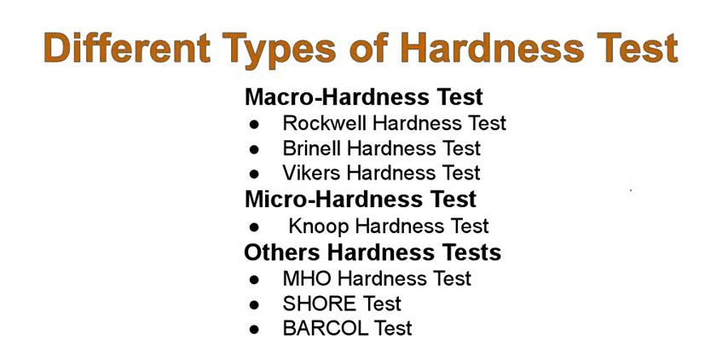Macro hardness test can be done by Rockwell hardness test, Brinell hardness test and Vickers hardness test, and the micro hardness test can be done by the Knoop hardness test. In case of micro hardness test, the indentations are very small, generally done on very thin samples. Other hardness tests like Mohs, Shore and Barcol have their typical uses. So one by one we are going to discuss each of the hardness tests. We'll start with the Rockwell hardness test.

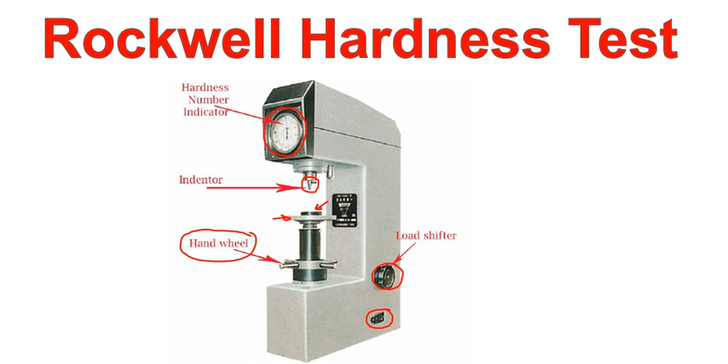Coming to the basic principle on which the Rockwell hardness tester works. Here this is the indenter. Initially a minor load is provided. This minor load is generally provided through the elevator screw, and after this minor load is given on the sample, let us consider this is the sample. As you can see, the major load is given along with the minor load. After giving the major load, definitely there will be deformation, or indentation, within the sample, and the deformation that will take place has two components. One is the plastic component, that is the plastic deformation, another one is the elastic deformation. So combining, this is the total deformation.

Then it is allowed around 15 to 30 seconds at the loaded condition, and after that the major load is removed. And when the major load is removed, some amount of elastic recovery takes place. As you can see, this is the amount of the elastic recovery. So elastic recovery takes place, but this portion, that means from here to here, you can see the permanent deformation that has taken place. So this permanent deformation, small d, definitely is a measure of the hardness, because if the material is soft, then definitely this permanent deformation will be more, and if the material is hard, then it will give more resistance, so this d will be small.

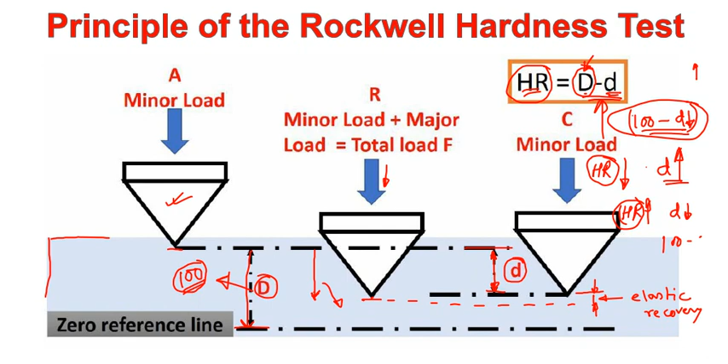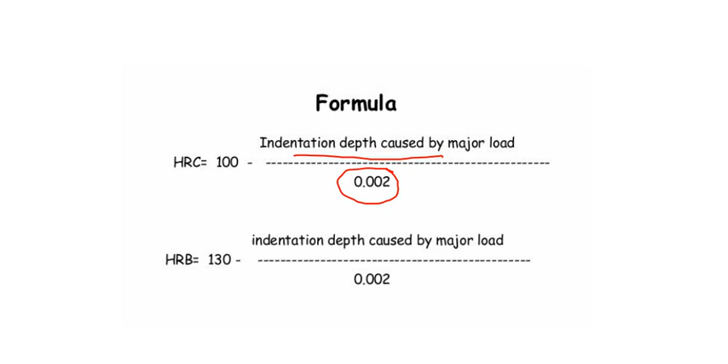Okay, and if d is increased, then 100 minus d will decrease. So in this way this quantity is considered as a Rockwell hardness number. But actually some scaling factor is there, so that is why you can see the indentation depth caused by the major load divided by the scaling factor. Scaling factor comes from the gear ratio that is there within the dial gauge, and because of the unit conversion to some extent. And you can see this is the constant value for the C scale.

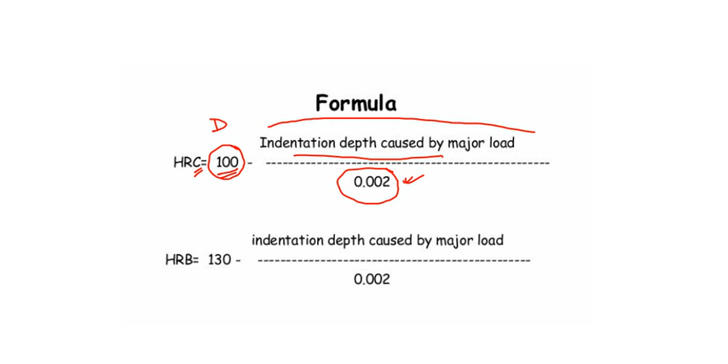Here you can see for the C scale the value is 100. In the previous slide you have seen this quantity as capital D. Okay, so the basic idea is the indentation depth small d is subtracted from the capital D. This is the basic idea of finding it out. HRC means the Rockwell hardness number in the C scale. C indicates a particular scale. Similarly, Rockwell hardness number in the B scale. In the B scale you see that the particular constant value is 130.

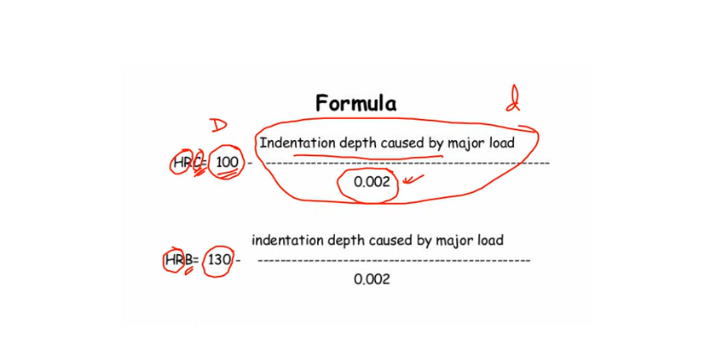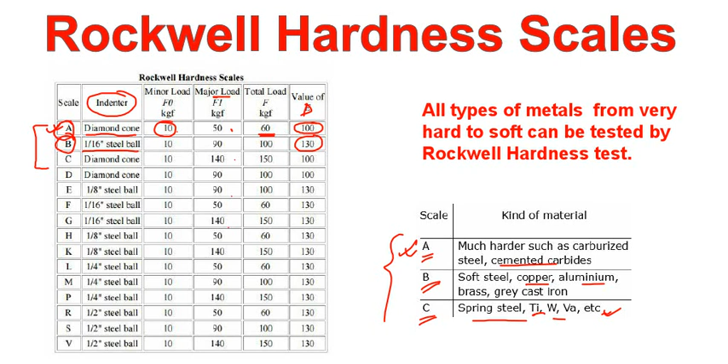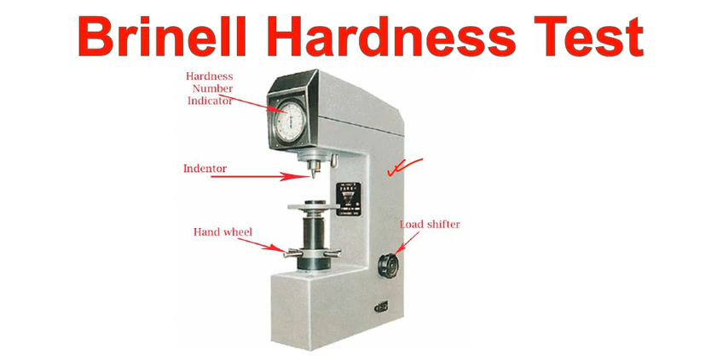Now coming to the Brinell hardness test, on the same test setup you can use the Brinell test. What is the principle? The principle here you have to remember is that a ball indenter is used, and the material of the ball can be steel. In that case Brinell hardness S indicates steel, or Brinell hardness W indicates tungsten carbide. So the material of the ball can be steel or tungsten carbide. So this is the indenter, and the indenter diameter is represented by capital D here. And then a load is applied. Suppose the load is P, applied in kg force, and it will definitely create some impression on the sample. So this is the sample.

It will create an impression, and if you take the projection from the top of the impression, you will see this kind of an impression of the indentation. The length or the diameter of that indentation is measured with the help of a low power, low magnification microscope, generally 10x is sufficient. You take a few data and then take the average of that. So here you will take the average of this, and you will get the indentation diameter, small d.

So here you can see, you put the value of the indentation diameter, put the diameter of the indenter that is used, and the load. Remember, the diameters are in millimeter and the load in kg force. Then you will get the Brinell hardness number. Okay, so the basic principle of the Brinell hardness number is, it is based on the area, the indentation area, the

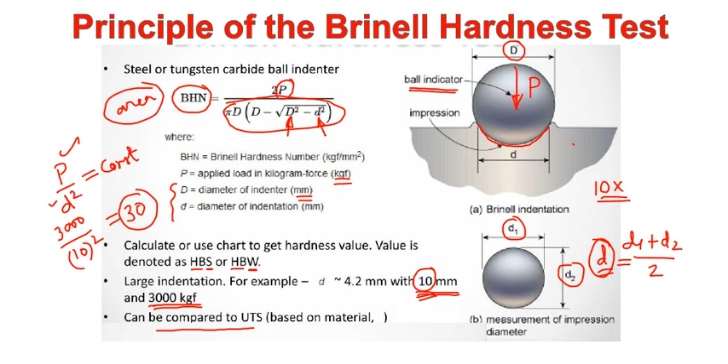Such that this P by D square is constant. So what is the value of this P by D square? You can see it is 3000 divided by 10 square, that means 30. So you select your P and D such that this P by D square is 30. Okay, now this is very, very important, that there is a direct relationship between the Brinell hardness number and ultimate tensile strength of the material.

Okay, many materials have a direct linear relationship with the hardness number. That means if you plot the hardness, Brinell hardness, and the ultimate tensile strength, sigma ultimate, you will get the data falling almost in a linear fashion. So definitely, depending upon the material, these constants are different, but for most of the steel samples, the relationship is that ultimate tensile strength in megapascal, remember, in megapascal, is equal to 3.45 into Brinell hardness number, BHN.

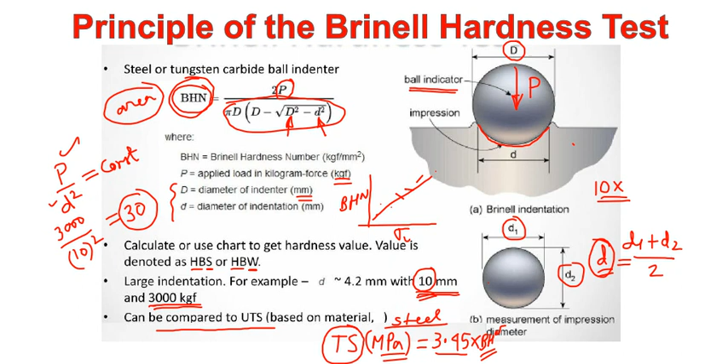Okay, so the Brinell hardness number you will calculate using this formula, and then multiply by 3.45, then you will get the ultimate tensile strength in megapascal unit for most of the steel samples. So here I have tried to show you the indentation measurement. That means the diameter of the indentation is measured under a microscope. As you can see, the low power microscope is graduated, and you can get the diameter of the impression.

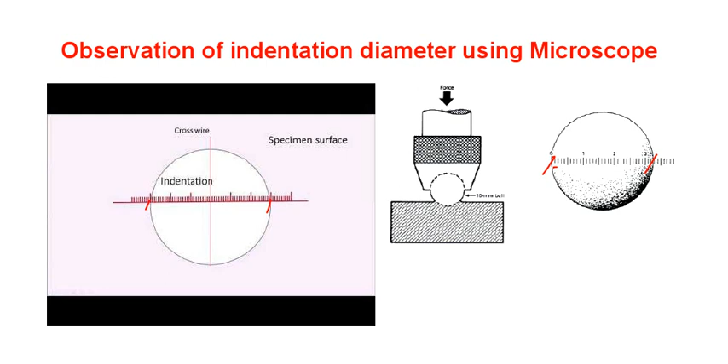Next we'll see the Vickers hardness test. Again, remember the Vickers hardness test, this is the indenter, and the indenter material is, again, diamond, but it is not cone shaped, it's a square pyramid. In case of Vickers, it is a square pyramid shape, and the angle between the opposite faces is 136 degree, and when it makes a mark on the sample, you will get this kind of an impression. So since it's a square base, you have to take the length of the diagonal. Okay, so the length of the diagonal, definitely these two, you have to take the average of the diagonal values.

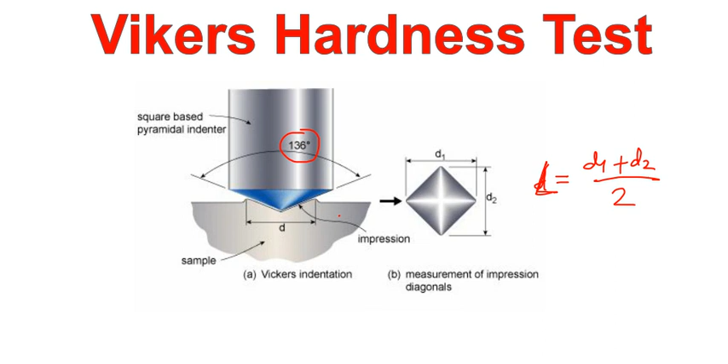So this is what you have to do, and based on that the calculation is there to calculate the Vickers hardness number. So here you can see the Vickers hardness number or the diamond pyramid hardness number. Diamond pyramid hardness or the Vickers hardness number is all the same. You have to use this formula,

1.854 into P divided by L square, where L is the average length of the diagonal in millimeter, and P is in kg force. That you have to remember. And regarding the load, it can vary from 1 to 120 kg.

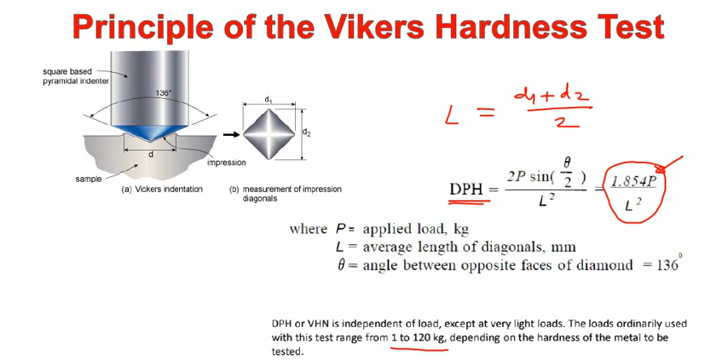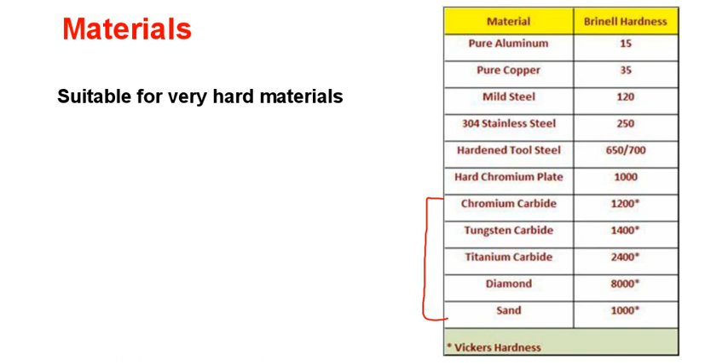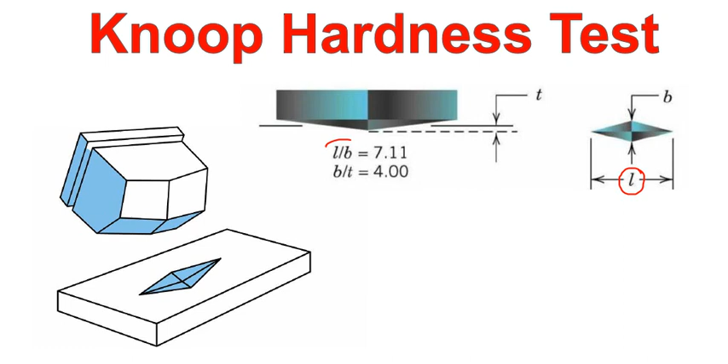Now coming to the Knoop hardness test, this is a micro hardness test, and in this case again the diamond indenter is used, but that pyramid indenter is not having a square base. As you can see, in the impression that it will create, the two diagonal lengths will be different, and the basic Knoop hardness number is based on the longer diagonal length, and the typical ratio of the geometry of the indenter, as you can see.

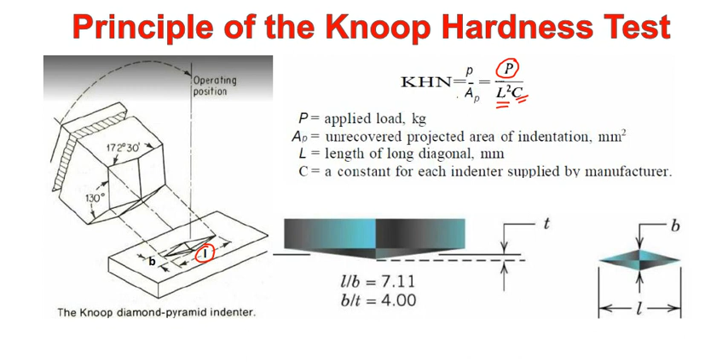So you can see here is the impression, and you have to take the length of the longer diagonal, and that L is used in the formula, and P is the load that is applied, and C is a constant that the manufacturer provides for that particular indenter. Remember, Knoop hardness is generally tested on very hard materials, and it is suitable for very thin specimens at some micro hardness. And these are the typical Knoop hardness numbers of some materials.

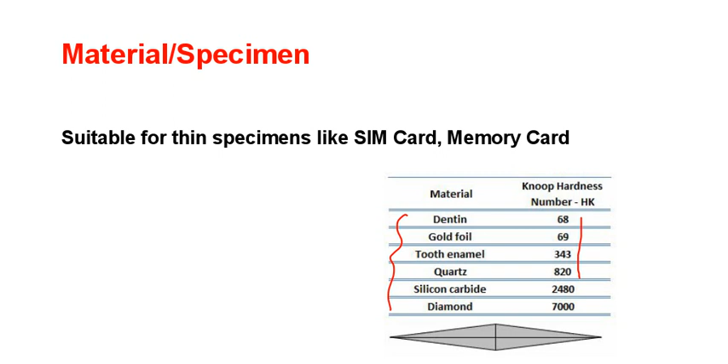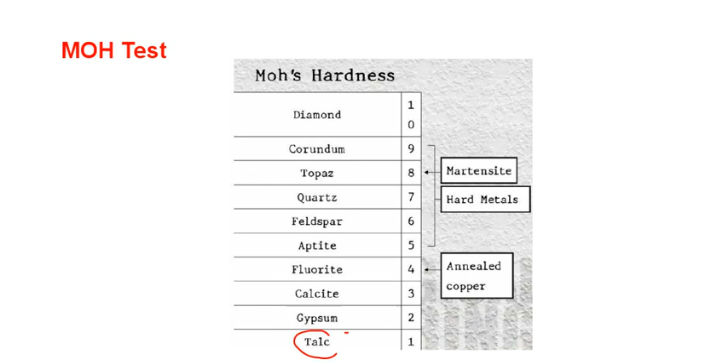Coming to the other hardness tests, like the Mohs test. The Mohs test is not a quantitative test like those we have seen till now. This is a qualitative one. Here you can see the Mohs scale, from a very soft material, talc, graded as 1 in the scale, and diamond, the hardest one, graded as 10, and others are in between.

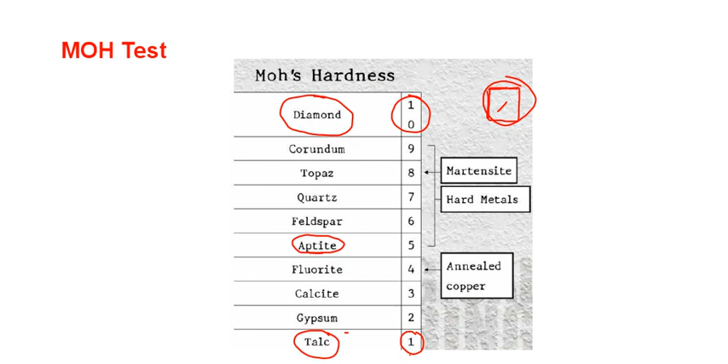So this Mohs test is also called a scratch test, because if there is an unknown sample, it is scratched by these different standard samples, and if it's scratched over the surface, that means this particular material is softer than that particular grade, so you have to go to a lower standard sample to scratch over it to identify its position within this scale.

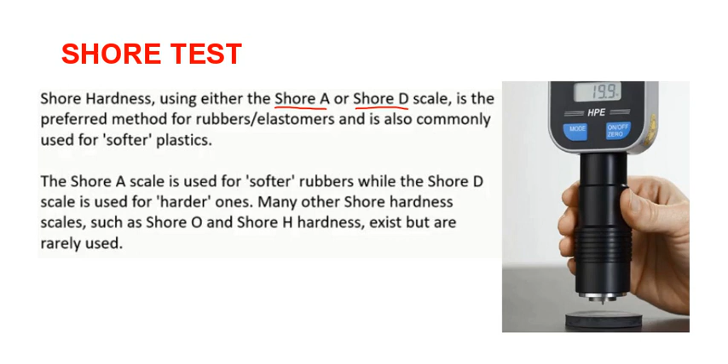Now the Shore test is typically used for soft plastics or rubbers. Two important scales which are very popular are the Shore A and Shore D scales. Shore A scale is for soft plastics, thermoplastics and the softer rubbers, whereas Shore D scale is suitable for the harder ones. The basic principle is again indentation, and the instrument through which the Shore test is done is called the durometer. That is why this is also called the durometer test or the Shore durometer number.

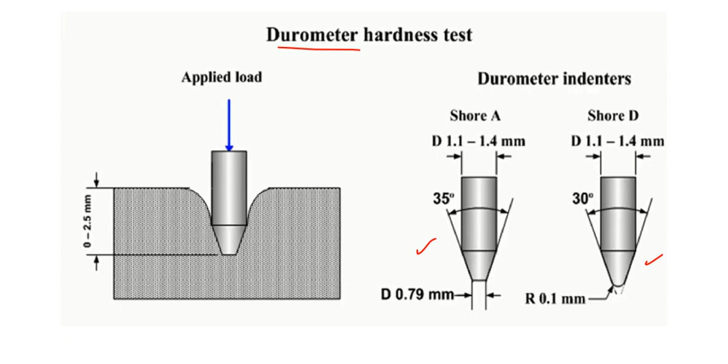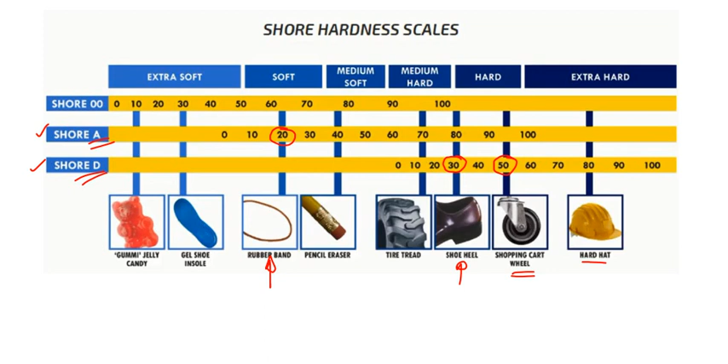Here you can see the typical geometry used for the indenter in the A and D scales. This is a comparative scale, and some materials have been given, like a rubber band, which on the Shore A scale is 20, whereas the shoe heel on the Shore D scale is 30. You can see the shopping cart wheel as well. The Shore D scale is suitable for the measurement of this kind of hard materials, like a hard hat. It is the Shore D scale which is the ideal one.